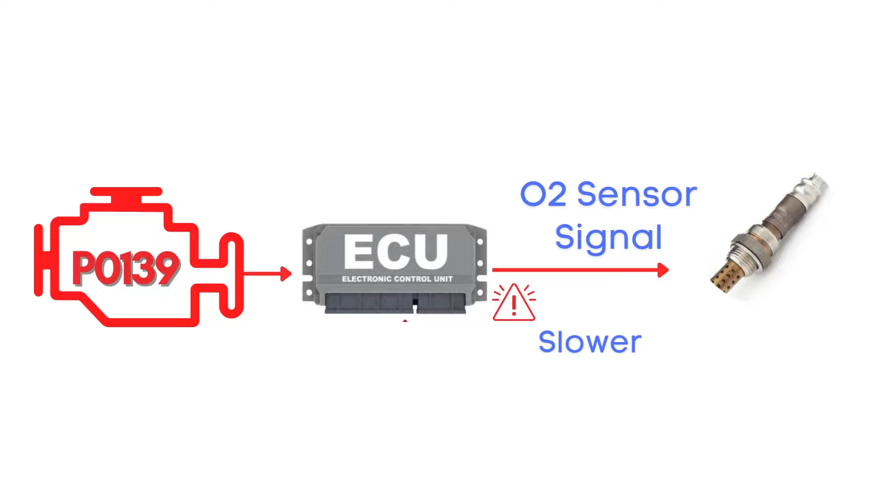First things first, let's break down what the P0139 code actually is. This code gets triggered when the engine control module detects that the signal from the oxygen sensor, also known as the air-fuel ratio sensor, is slower than expected. Specifically, we're talking about the oxygen sensor for Bank 1, Sensor 2.

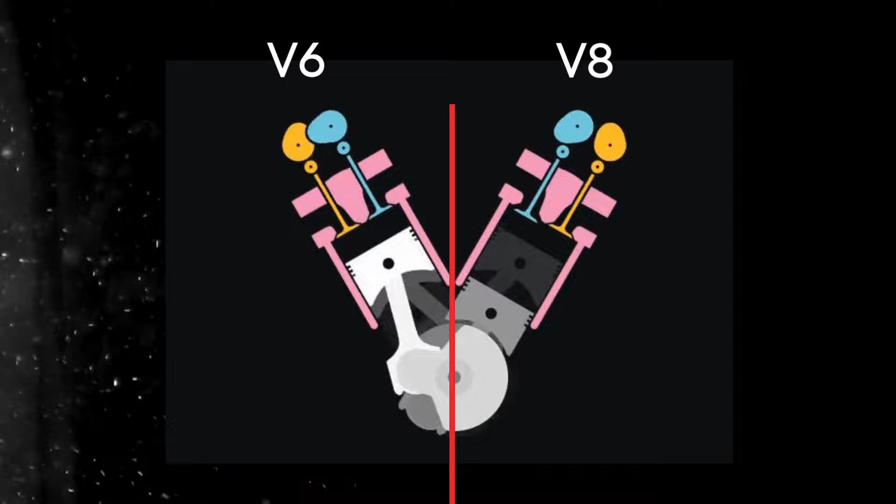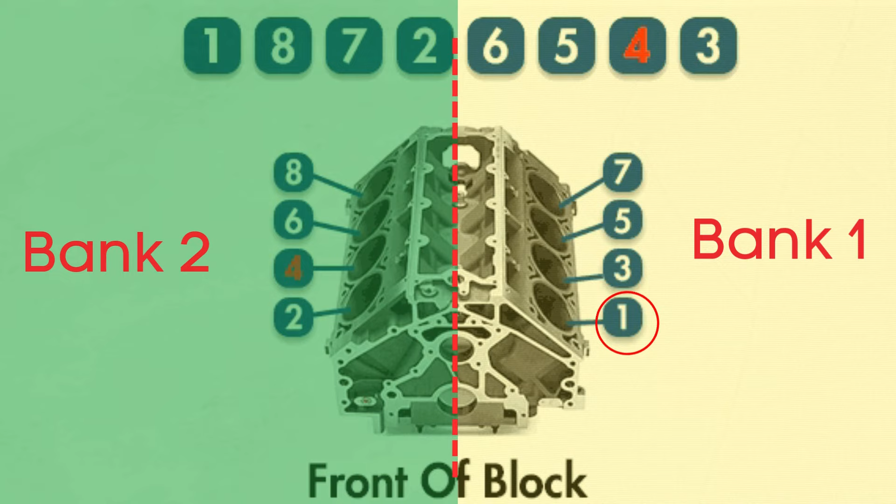Now let's learn what Bank 1, Sensor 2 is. In engines with multiple cylinder banks, like V6 or V8 engines, you'll have two sides or banks of cylinders. Bank 1 typically refers to the side of the engine where cylinder 1 is located, and Bank 2 is on the opposite side. Each bank has its own exhaust line, and each exhaust line is equipped with a catalytic converter.

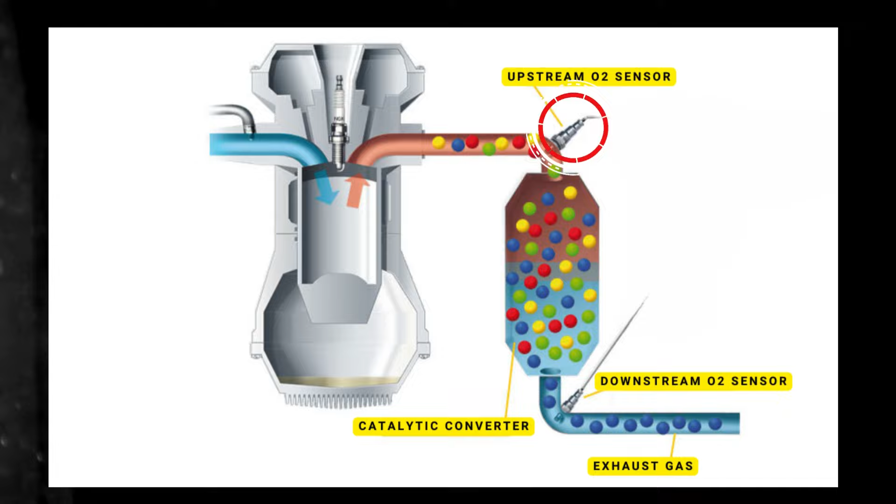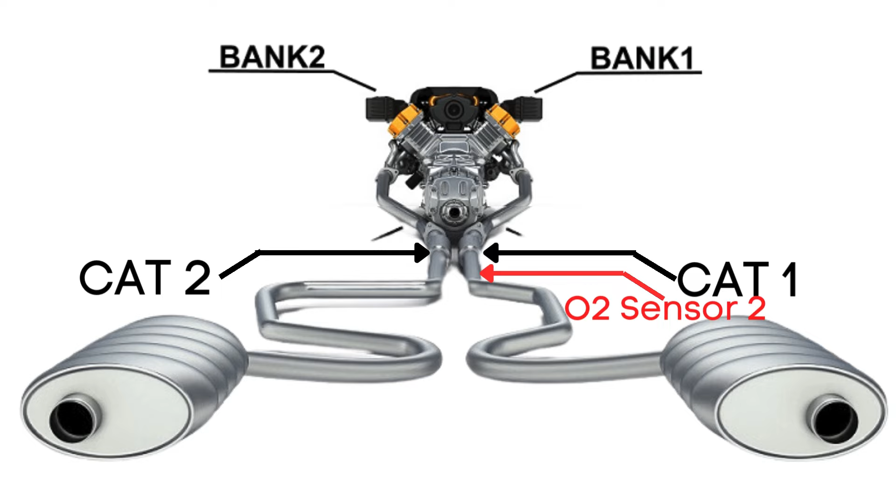Now, here's where the oxygen sensors come in. Each catalytic converter has two oxygen sensors: an upstream sensor, which we call Sensor 1, and a downstream sensor, known as Sensor 2. So when we talk about Bank 1 Sensor 2, we're focusing on the oxygen sensor that's downstream on the side of the engine where cylinder 1 is located.

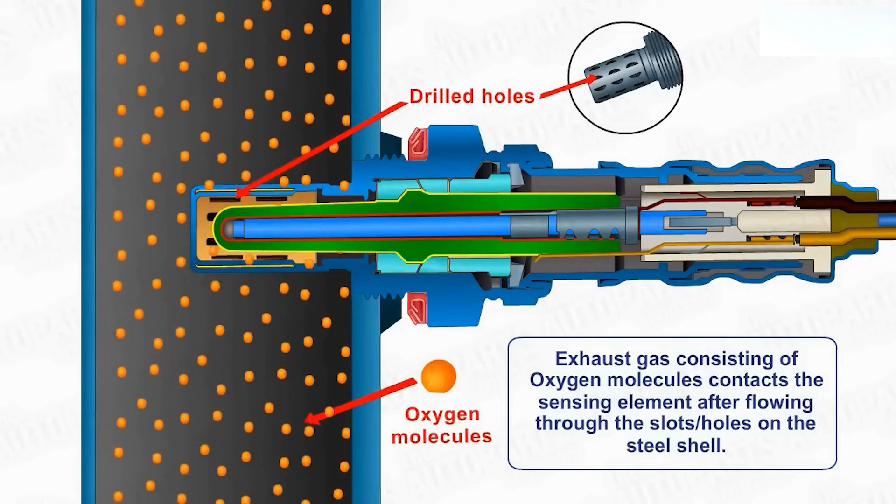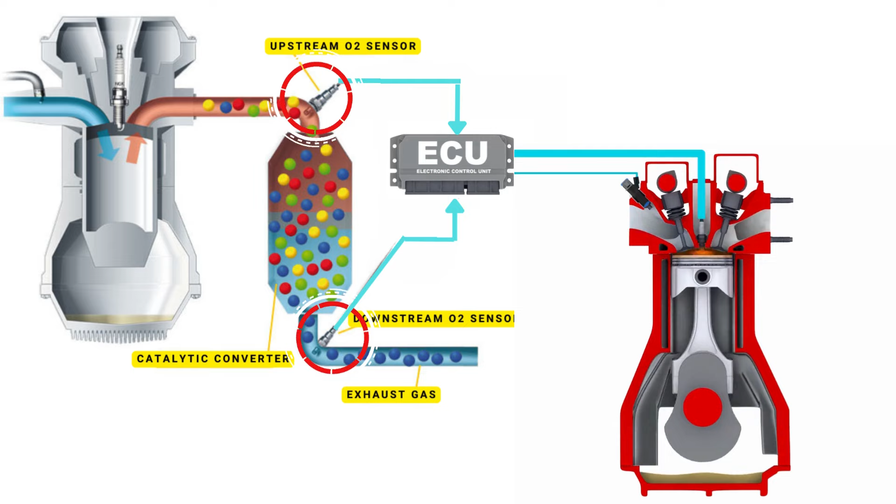An oxygen sensor typically has 4 wires. 2 are dedicated to the heater circuit within the sensor, and they're often the same color. The other 2 are signal wires: one is a reference ground, and the other is the actual oxygen signal wire.

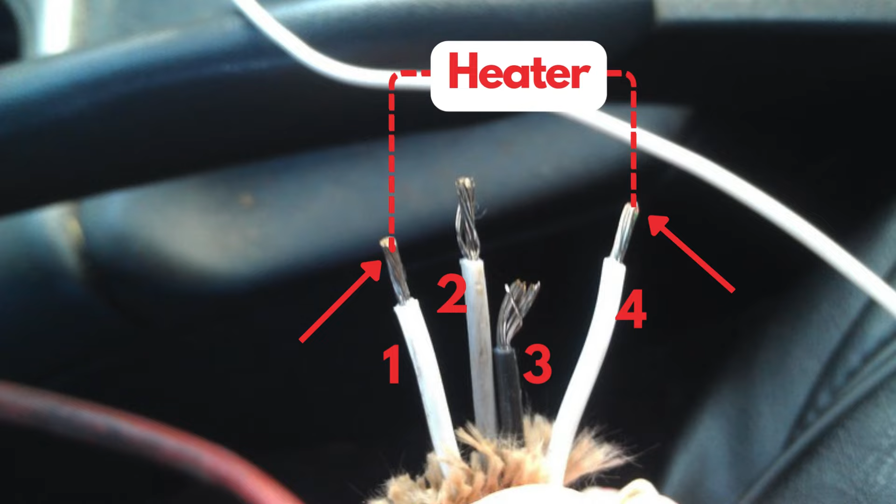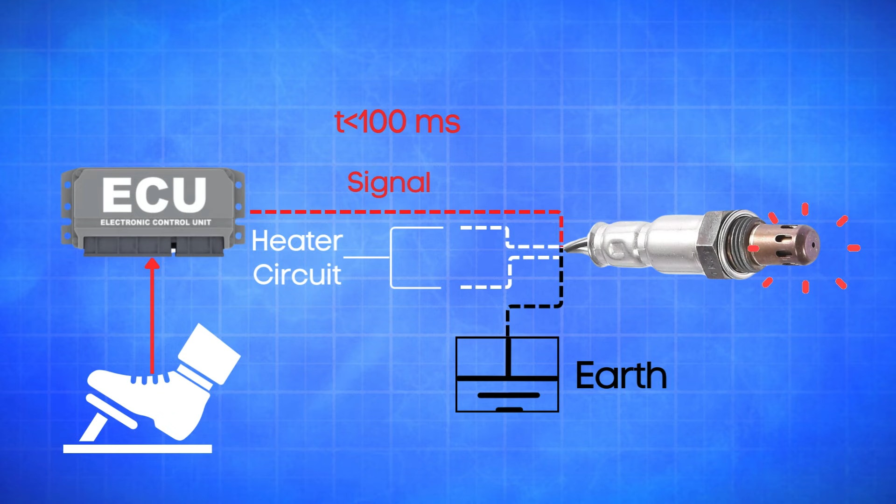Now, in an engine operating perfectly, the oxygen sensor should quickly respond to changes in the throttle position. When you step on the gas, the air-fuel mixture changes, and the oxygen sensor should register that change almost instantly, usually within 100 milliseconds or less. If the ECU detects that the oxygen signal in Bank 1, Sensor 2, reacts slower than this, the ECM flags it as a problem and sets the P0139 code.

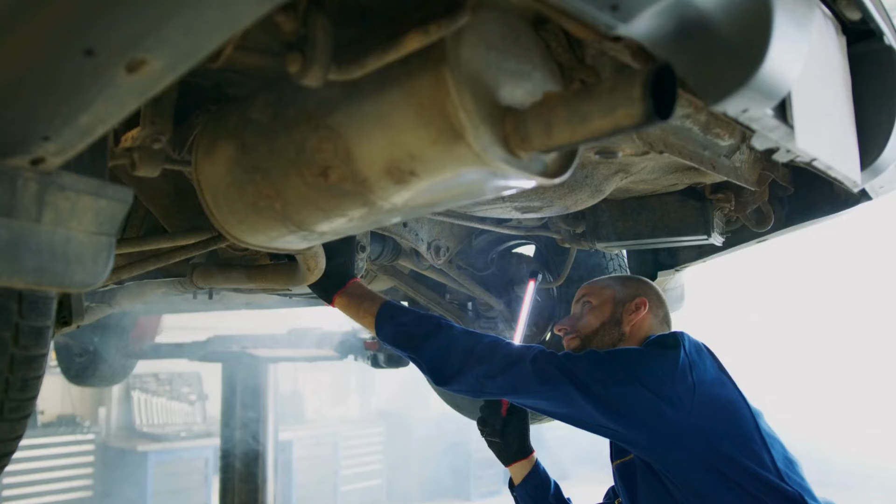Now, where exactly is the P0139 sensor located? The P0139 sensor, also known as the oxygen sensor or air-fuel ratio sensor, is generally located in the exhaust system, downstream of the catalytic converter on Bank 1. This sensor position can vary slightly depending on your vehicle's make and model, but it's usually found near the catalytic converter.

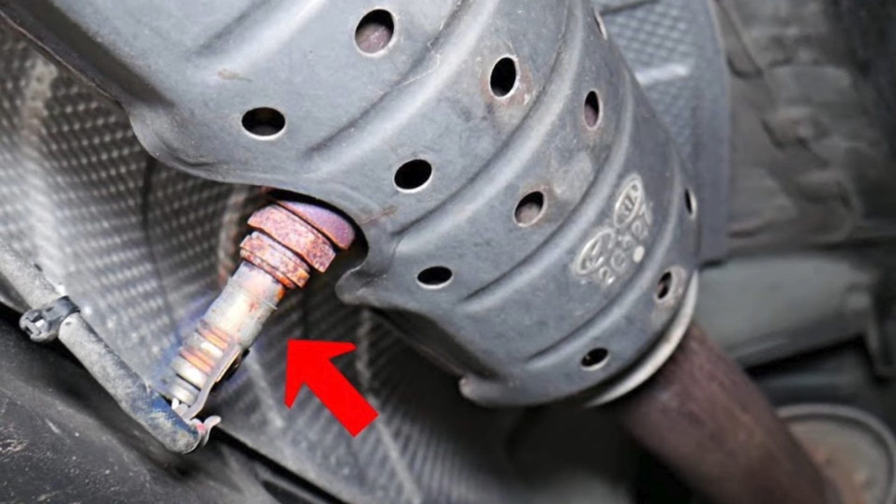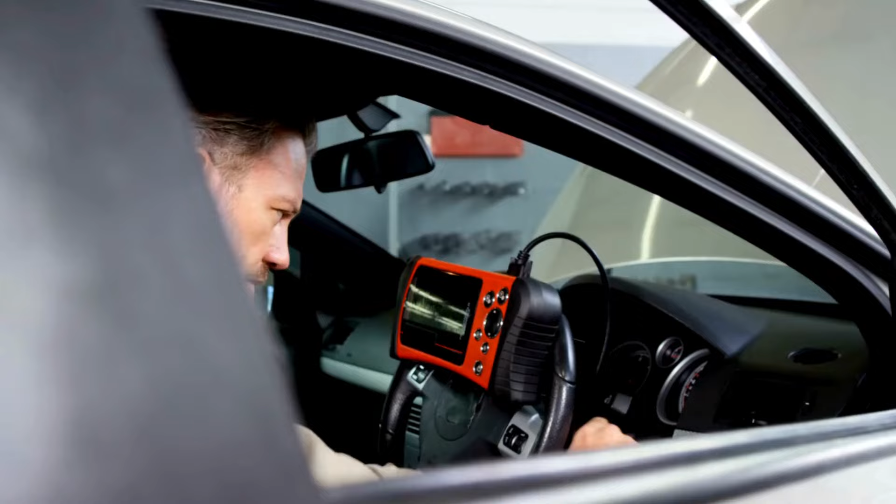Now that we understand what P0139 means and where the sensor is located, let's cover how to reset it. Sometimes error codes like P0139 appear due to recent maintenance or temporary glitches, and they may clear up after an OBD2 reset. To do this, you'll need an OBD2 scanner.

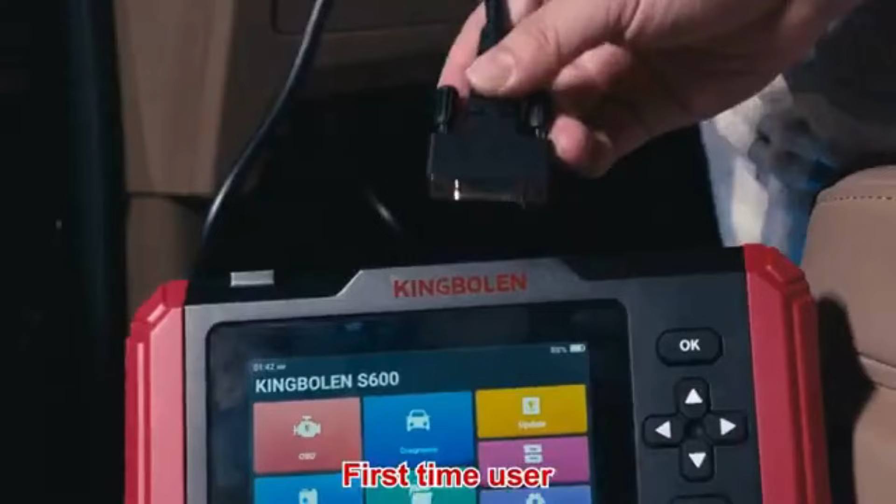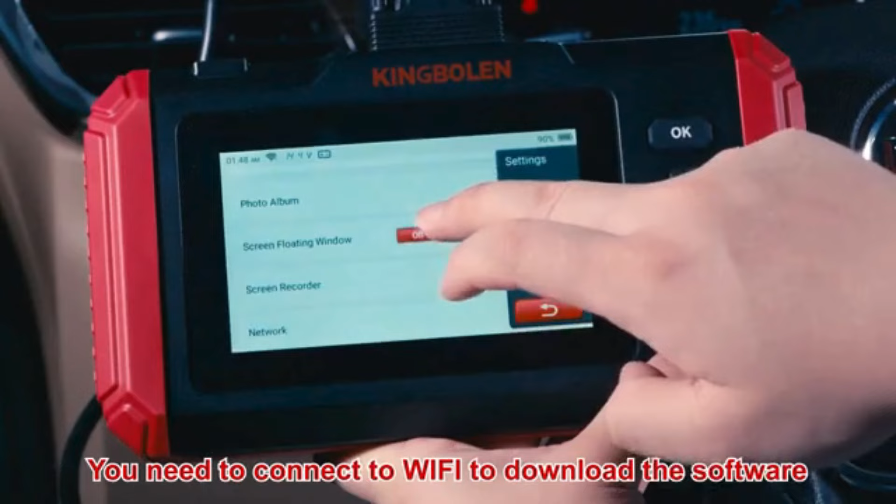Simply connect the scanner to your vehicle, follow the instructions to clear the trouble codes, and see if the P0139 code reappears. If it does, it's time to look into some common root causes of P0139. Let's discuss some common root causes of the P0139 error code.

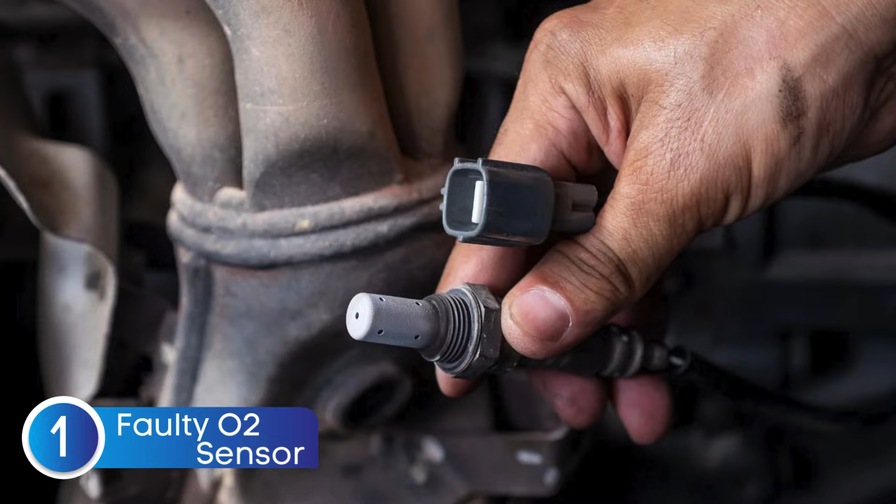The first cause is a faulty oxygen sensor. Sometimes the oxygen sensor itself may fail due to wear or contamination.

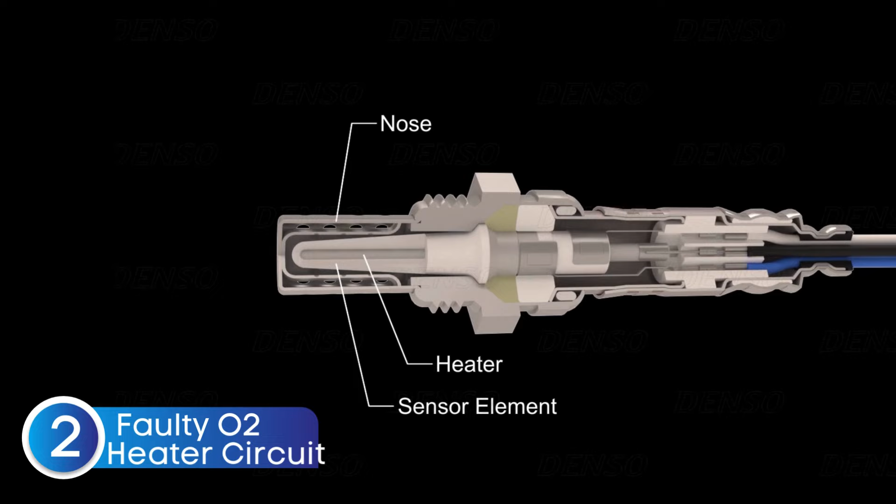The next cause is a faulty oxygen sensor heater circuit. Oxygen sensors need to reach a specific temperature to work effectively, which is why many have an integrated heater. A faulty heater circuit can prevent the sensor from reaching optimal operating temperature, resulting in incorrect readings.

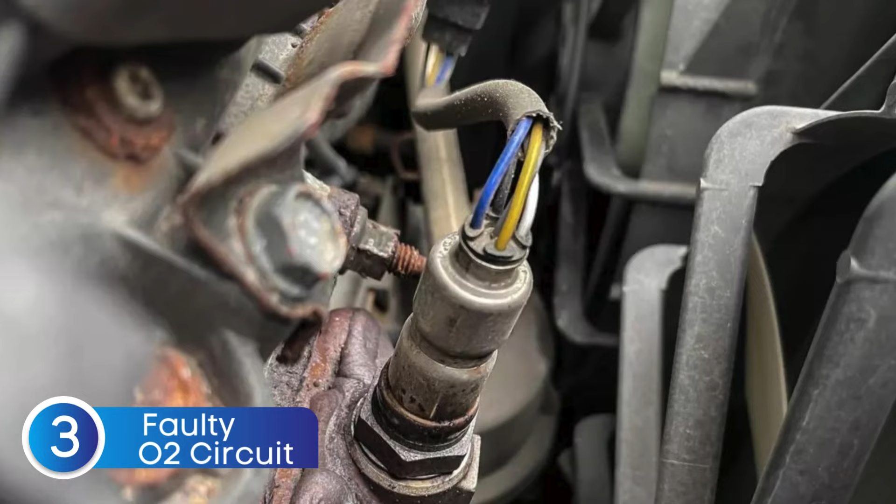The third cause is defective sensor wiring or circuit problems. Issues like a blown fuse, broken wires, or poor connections in the oxygen sensor circuit can disrupt the signal to the ECU, causing the P0139 code.

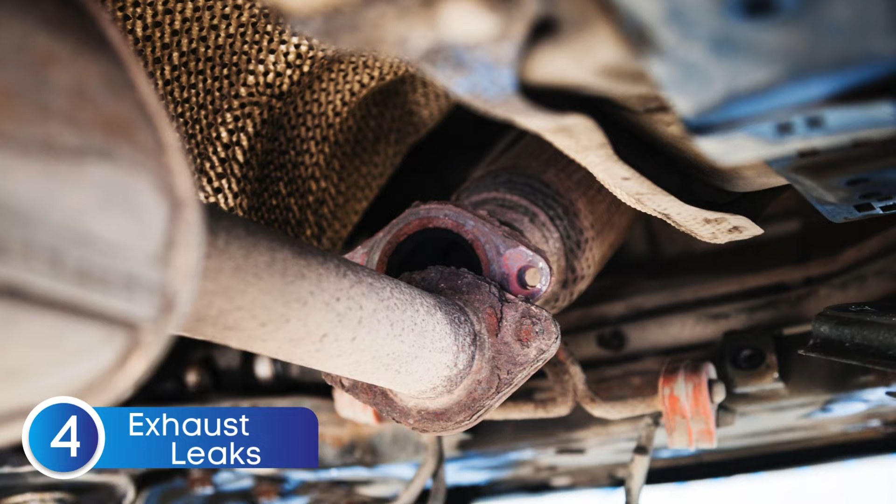The fourth cause is exhaust system leaks. A leak in the exhaust system can allow extra oxygen to enter, causing the sensor to misread a lean condition.